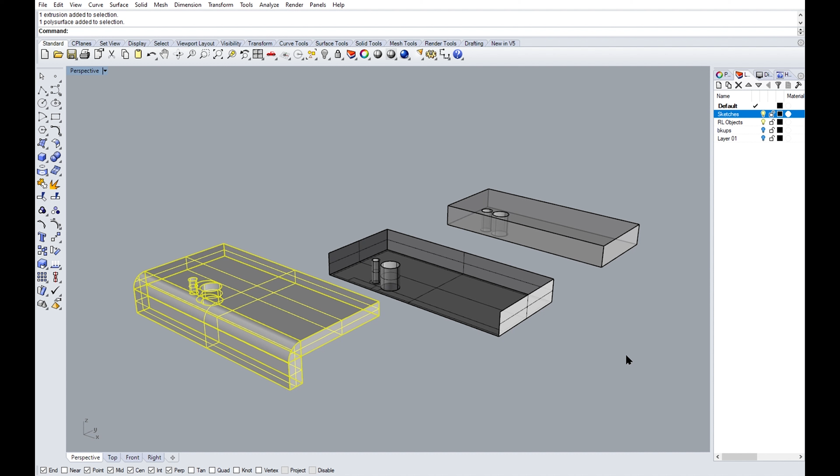So here we are for the design of the Bluetooth mount, and this is the object here with the through hole for the screw attachment and the through hole marking the button. Turned out I had that a little mismeasured, and so I ended up having to move that in the final mount here, but we will circle back around to that.

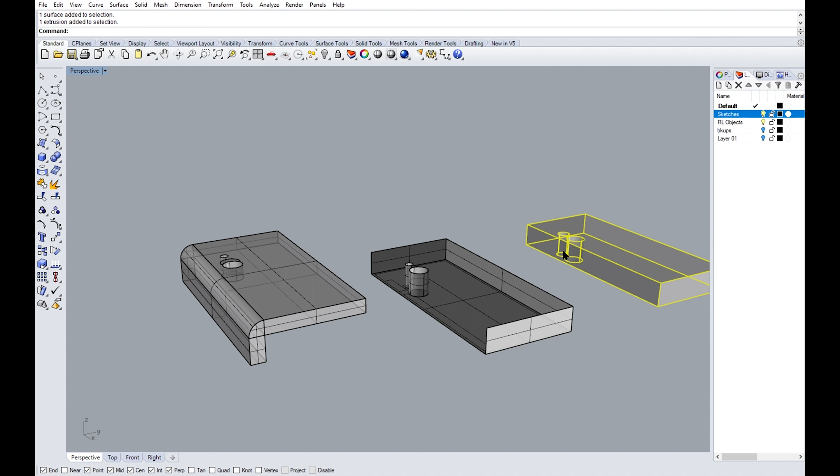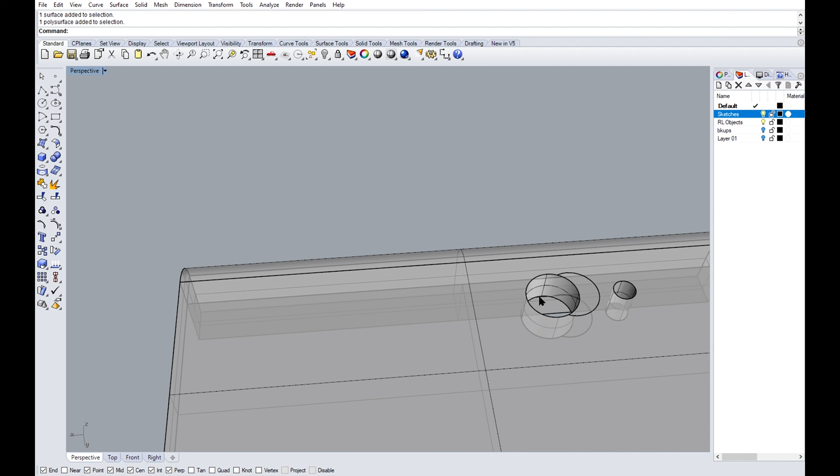So what I did to get the basic mount shape was I offset this surface, offset the object, offset surface in Rhino, and that gave me this object which I have exploded into surfaces, and I've stolen these two surfaces here, and then joined those and offset those. I also had to subsequently come along and move my hole over, which I remeasured, marked with another curve, moved the hole, split the object, and then took the semicircle or the moon crescent shape and spun it around and rejoined it up.

So that is the basic outline for the mount.

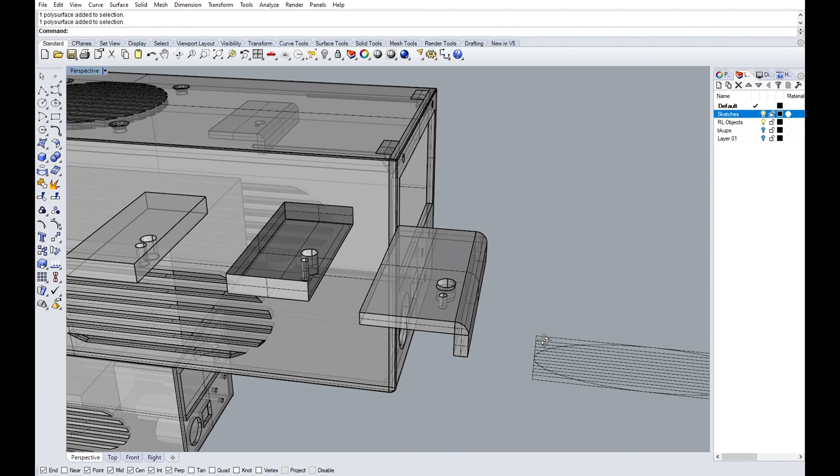So the Bluetooth device will be mounted up there, as you can see in the mock-up over there. And I've already printed that out to test the fitting, and with a piece of double-sided tape it will fit very snugly in here and be screwed in.

But this needs mounting, and I'm going to incorporate it into the print and have to modify the top there, and I still have to make the modifications to get the clearance from before in part 1. But I'm also going to make a mount for my version, which is of course the prototype, and that's going to have some screw attachments.

Okay, so when it comes to making clearances on models you have done a lot of work on and don't want to start again, there's really a couple ways to do it. You can scale the whole thing and actually just shorten this dimension of it. It would be scale 1D and just shorten it. Boop.

The thing is, you throw everything out of skew. So if you select this point as your origin and drag everything down a little bit, these holes will be 0.05 of a millimeter out of alignment. It's not a massive deal, but it sort of messes everything up. And if you're working with tight tolerances, that's just not going to work for you.

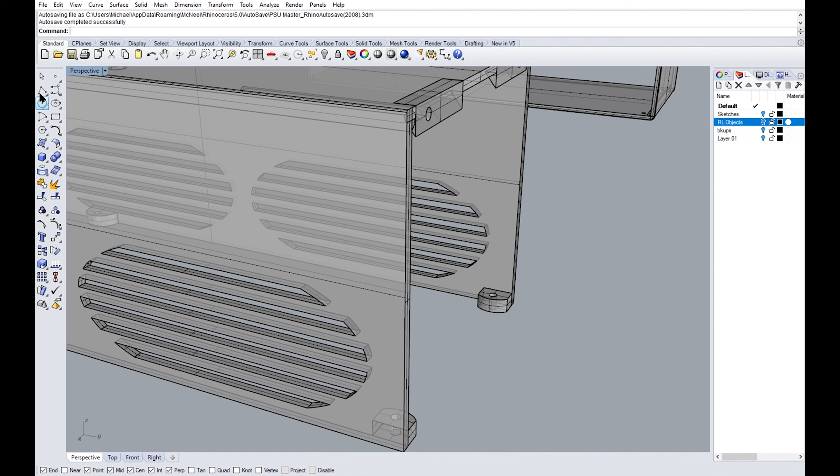So what I'm going to show you here is how to remove a very thin slice. Now down here, this is the measured distance, but I don't have anything off the actual item. I don't have anything accurate enough to measure something this large, this long, down to half a point of a millimeter.

So I'm just going to go ahead and take a whole 0.1 of a millimeter off it. I'm thinking that should be enough. If it's not, at least it's going to cut down the filing work a little bit.

Anyway, we're going to start with 0.1, and I'm going to go with that for the Thingiverse version. So there may be a bit of filing in that, but if there is, people let me know. I can take another slice off it and re-upload.

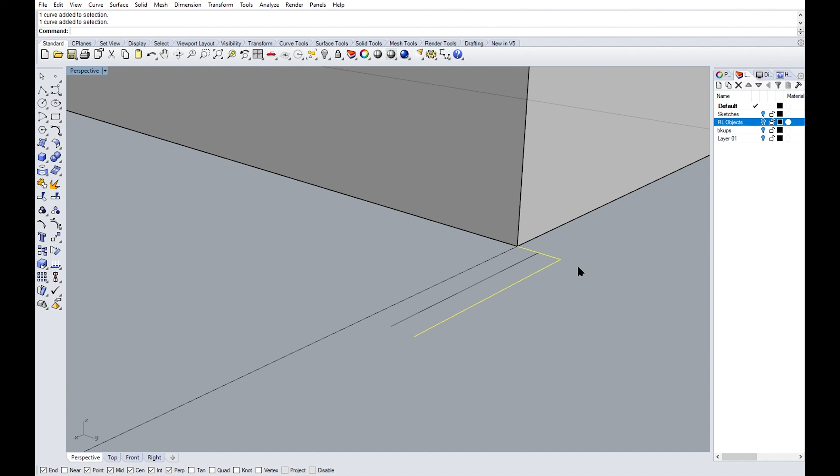So, right, what do we do? Well, this is facing the wrong way for a start, so I'm just going to mirror it there, and then I want to get myself a big old line, zoom out and go right across.

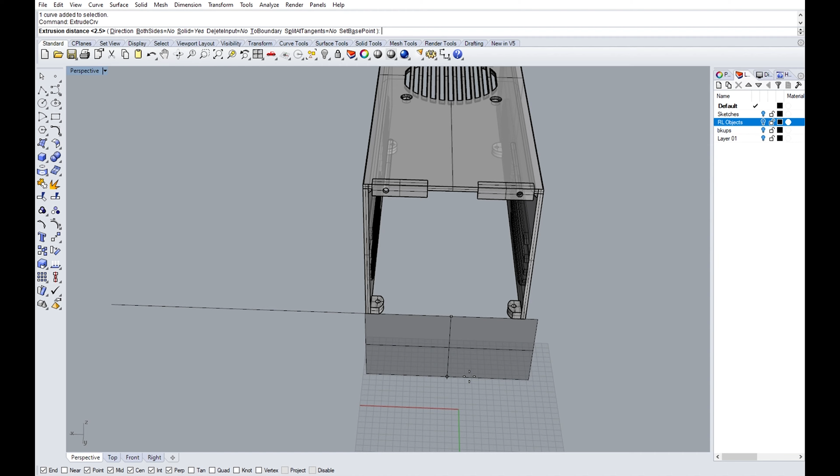What is it to make? Okay, apparently that's confusing me. And then we extrude a surface of this all the way through the object, right? Then you split the object with the surface, split the surface with the object, delete the bits you don't want, and so on and so forth.

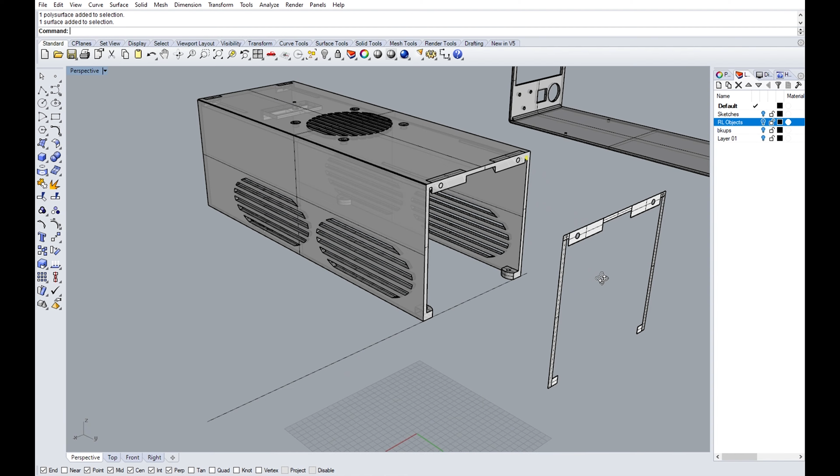Now there is a very thin slice of object here, and there is a wall, as you can see. So then you just want to join that all up, and that should plop exactly. Oh, my vision is all messed up. There we go.

Into place. Oh god. Alright, so that was not what I wanted. So with that in place there, you can see it's slightly offset down there. So we'll zoom in and move them both to the center. And now there is a little bit of clearance between the two objects.

And there we go. Exciting, I know. Clearance. That's 4 minutes and 40 something seconds of your life you're never getting back. But thank you for joining me.

Anyway, let's get on with rigging up that fan. Sorry, quickly, I forgot, I've just added these tabs up in here, and it's the same process of splitting and joining them to the bottom piece there. So we'll skip that and move on.

We have to mount this up here, and we have to wire this in, and I'm going to cut these wires and put them onto here. So here we are, we have the top, and this will have to go in here.

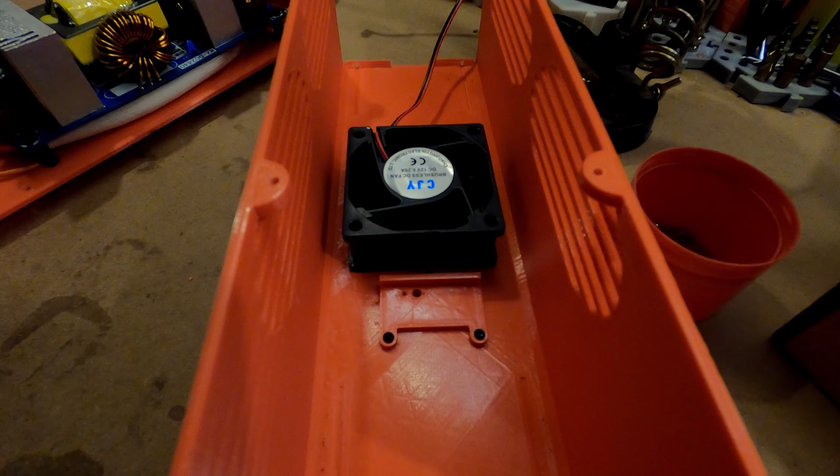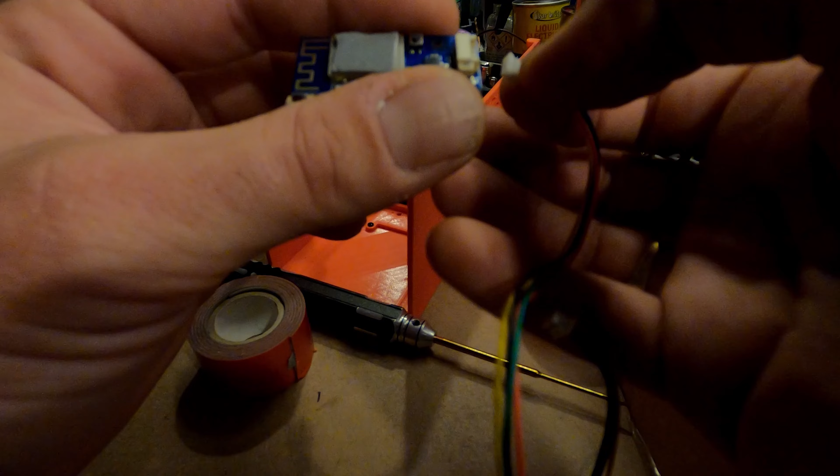I'm going to cut off some of this tape, stick it on here, and mount it back in. It's taped up and ready to go, and you probably want to put this cable in first. When you do, try to hear this as much as see it. Line up the pins, but listen for a nice, solid click. Then you know she's in, she's home, she's happy, and it's not going to be a waste of time putting it back together.

Okie dokie, so that's the Wi-Fi mounted. That needs to get plugged in back under here. You can do that later. You can see there's just enough for us to take the top off and put it to the side there. And that's what you want, that's how much length of wire you really want there.

So now let's put the buck converter in this line, and then we can run it off the 24 volt. So what we've got here is a 24 to 12 volt buck converter, a 12 volt fan, and a 24 volt source. So this is the in. Yep, this is the in.

I will probably just take these off and replace them with another set of wires. I'm going to be snipping this and soldering it to where these wires are here on this side. So I'll get on with that, and unfortunately my top camera is down, so I'll just have to quickly work through it and use the other camera mount to film it with the GoPro for you.

Okie dokie, so this is the power, this is the line to the fan. I'm going to trim this and put that in my spares tub, to be sorted. Split the line out, and then that is going to get soldered onto here and here. But first I'm going to figure out my lengths exactly. So let me just bring this back over here.

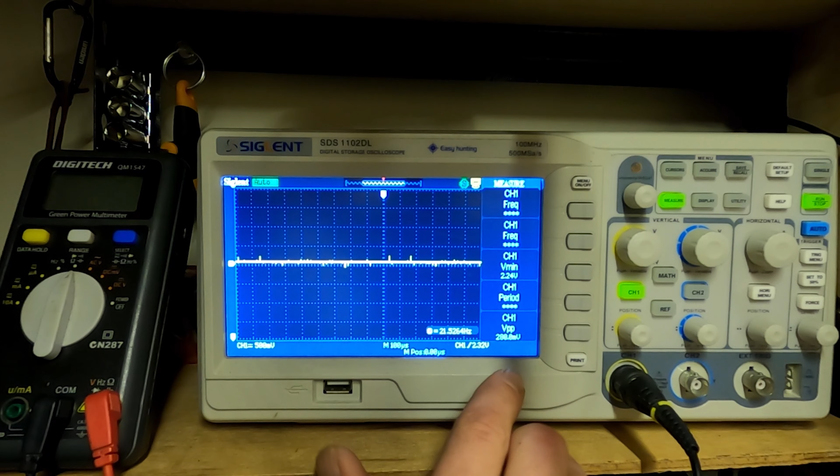Okay, so here is the output for the power supply, and it's got a total spike here, top to bottom of these spikes of about 400 millivolts. And that's putting out at 24 volts, so it's not entirely bad, but it's actually putting out at 22 minimum. So it's not putting out the full 24, I don't think. Let's have a little look on here.

Oh no, 24. I wonder why that's saying 22. Maybe it's because they got the resistor in series with that, because it's in the 10 times mode. Anyway, alright, that's that then.